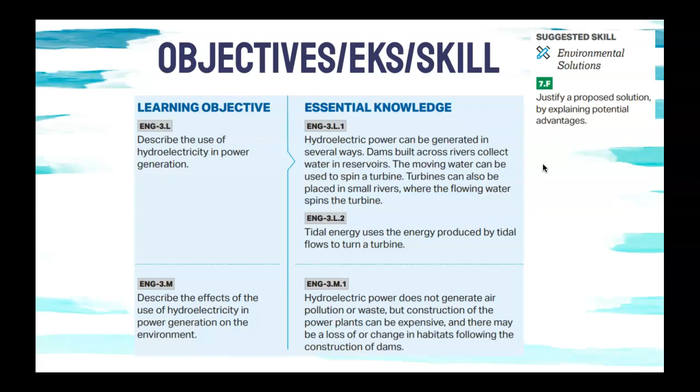So you need to be able to not only describe the use of hydroelectricity with respect to power generation, but you also need to be able to look at the impacts of hydroelectricity on the environment. And so, as a part of hydroelectricity, you'll also need to not only look at traditional damming of rivers and generating electricity that way, but also looking at tidal power as well.

So, some basics about hydroelectricity. So we're taking the kinetic energy of the moving water, so water that is flowing typically through a stream, and we're going to use that to spin a turbine, which is generating mechanical energy, which is then going to power a generator, which is going to create that electrical energy.

So much of the same process that we've been talking about with fossil fuels or with nuclear energy, except that we're not heating the water. We're simply using the kinetic energy of the water to spin the turbine. So we can look at it with the natural current of the river, or we can do it with tides, or we can dam a river and then kind of have the water drop and use that kinetic energy of the falling water.

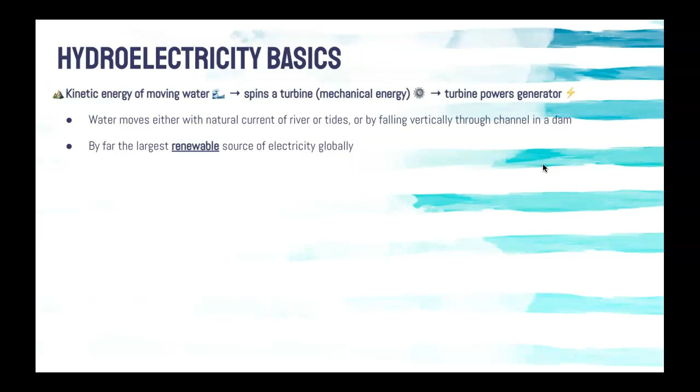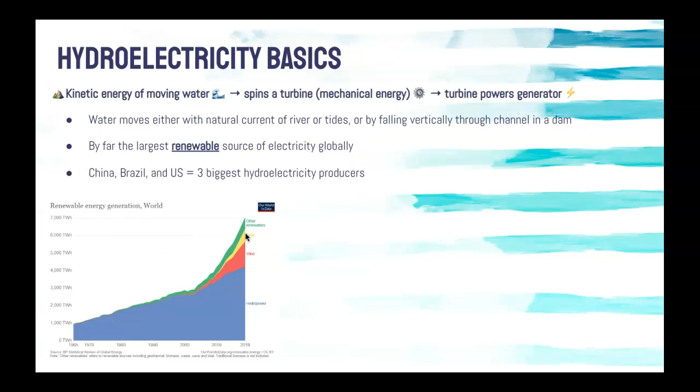So I really need you to understand this process in terms of how does it work? How are we getting energy from water? And so typically we are going to dam a river. So we're going to build a dam in a river. We're going to create an artificial lake behind that dam. So we're going to dam the river and then create this reservoir or this big, basically storage tank of water behind the dam.

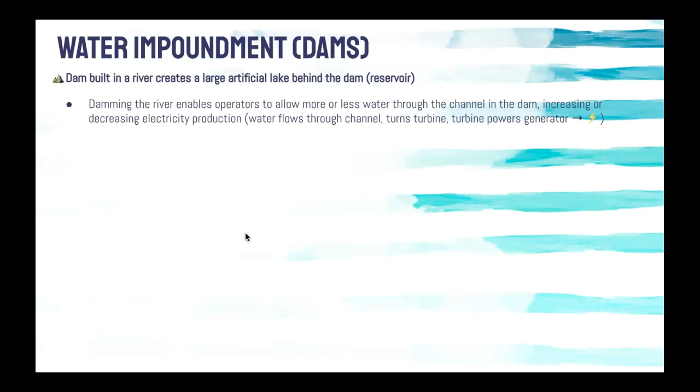So a dam allows us to control the amount of electricity that we're producing, but it also helps in terms of prevention of seasonal flooding. So a lot of times a dam is a welcome thing because it's going to prevent the flooding downstream that may be experienced in the spring or during large rainfall events.

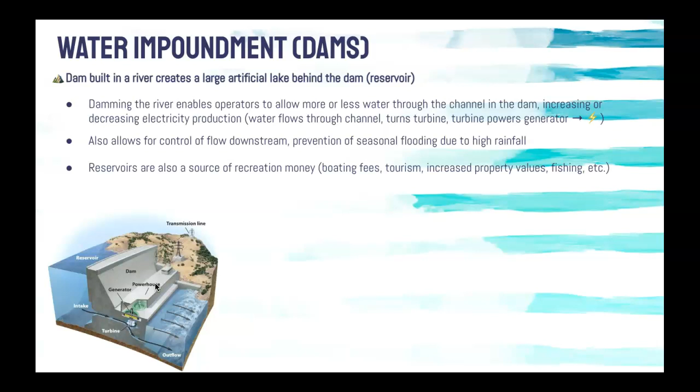Another positive about the damming of rivers is it creates this large reservoir behind the dam. And so that can be a source of revenue because now we have a place to boat and to fish, and you can build homes along the edge of the reservoir. And so it increases property values, which in turn increases your tax revenue and things of that nature.

The two big environmental impacts that you would look at in a negative light are, one, when you build the dam, you're going to flood the land behind the dam. And so you are going to ruin or flood ecosystems that were previously intact behind there.

And then the other thing that happens is that the flow of the river brings with it sediments, and those sediments are often rich in nutrients, and because we're damming the river, those nutrients don't continue downstream, and those sediments can build up behind the dam, and we call that sedimentation. So that may need to be dredged periodically to remove the sediments that are building up behind the dam.

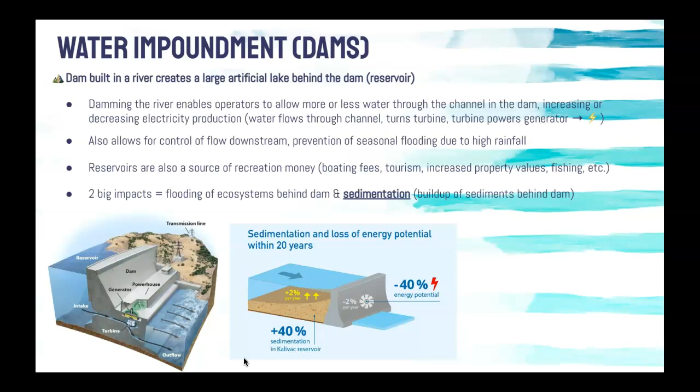So what happens is, if sedimentation is happening, it can decrease the energy output of the dam, which is why sometimes that needs to be dredged and removed.

So another system of generating hydropower is called a run-of-river system. And then we also have tidal power. So now these are different than our traditional hydroelectric power plants where we're damming a river. A run-of-river system, you're still going to dam the river, but you're going to divert the natural current, and you're going to kind of send it through a channel, and then that's where that turbine is going to spin and then generate electricity.

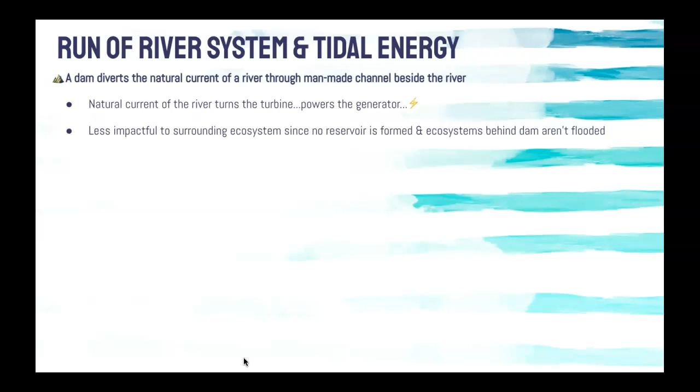So this run-of-river system is more environmentally friendly in that it's not creating a reservoir behind a dam. So we're not losing those ecosystems behind a dam. It is still damming the river, so if the river is dammed, then navigation can be an issue and that kind of stuff. But we're not creating that reservoir.

So we're just creating this channel here where you're going to run the water through this channel and then into an area where we're going to spin turbines and generators, and then we're going to put the water right back into the river where it was. So because we are not creating this massive dam with a massive reservoir behind it, there is still natural flow of sediments through that dam. And so we have less sedimentation as a result.

The issue with this kind of system is that it doesn't generate nearly the amount of power that a traditional hydroelectric dam might create. And if water levels get too low in the summer, it may mean that at some point you can't even divert the water through this system because the water levels are too low.

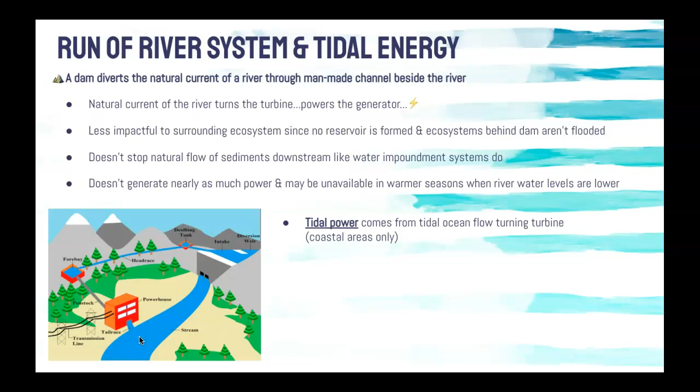Another type of hydropower is tidal power. So this comes from coastal areas where the tides go in and out. We're getting those tides to flow through a system of turbines on their way in and then again on their way out. So as the tide changes, we have movement in, spin those turbines, or movement out, spin the turbines again.

One of the things about tidal power is that you really have to have a very large differential in your tides. So the area, Delaware, we don't have a large enough difference between high and low tide to really make this type of power worthwhile. It's very, very expensive. And the other thing is it needs to be done in an area where it's going into a narrow bay and then coming back out of this narrow bay so that you can get the largest amount of power possible. There are not a lot of these tidal generating stations worldwide. There's one in France and a couple others in Europe, but not many.

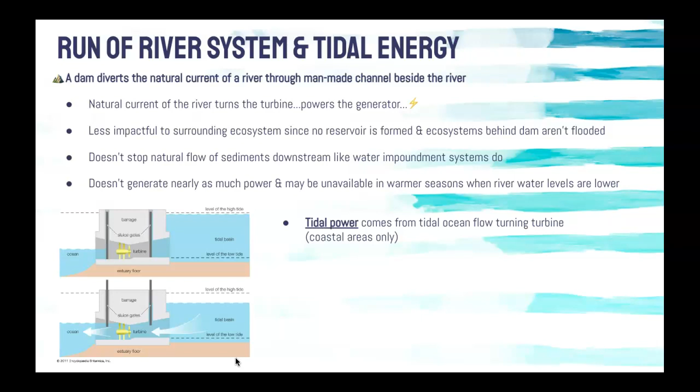So, drawbacks of hydroelectric dams. So, in green are the ecological issues. So, the reservoir is going to flood habitat behind the dam. So, we could lose forest habitat, we could lose wetland habitat. And we know that wetlands are super important in terms of water filtration and breeding grounds and things like that.

It also prevents upstream migration of fish. So salmon, particularly, are born in freshwater rivers and streams, and then they swim out into larger bodies of water, big lakes and oceans, and then they return to spawn or to mate and to lay their eggs back in the original place that they were born. If a dam is there, it creates a problem for those salmon not being able to return to their original spawning grounds.

Sedimentation is another ecological problem that we talked about. So sediment builds up behind the dam. This often makes it so that the upstream habitat becomes warmer. There's less oxygen in those upstream habitats, and then the rocky stream bed that a lot of organisms need to lay their eggs becomes covered in sediment. So it's no longer ideal for laying eggs.

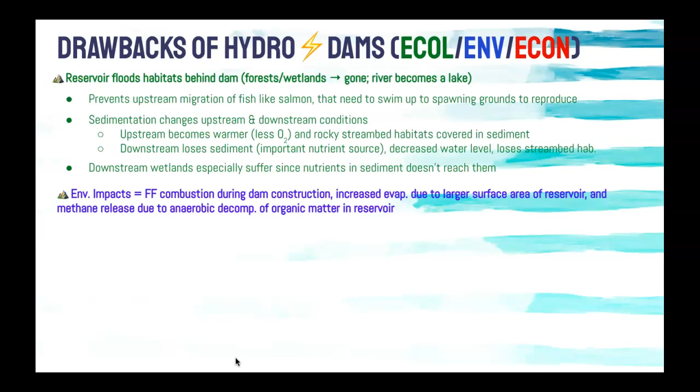Some economic impacts of these dams. Obviously, if there were previously existing homes, businesses, towns, things like this behind the dam, those get flooded and they would need to be relocated. Initially, the cost of building dams is very, very high. The cost to run them is low, but the initial construction of the dam is high. And so there's jobs initially, and there are long-term jobs. And then we have to dredge for the sediments, which comes at a cost.

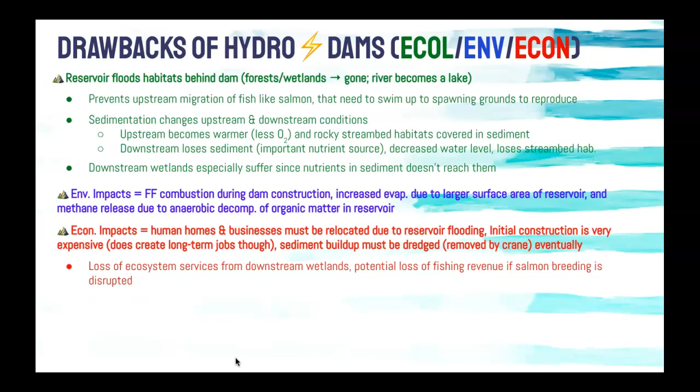Also downstream, because of the lack of nutrients and reduced water levels downstream, we may see the dry up of wetlands downstream, which can be problematic. Now, the last thing in there was also potential loss of fishing revenue if salmon breeding is disrupted. So this is an issue. Salmon are a big business, multi-million dollar business. And so what has happened in a lot of these cases is that we've built fish ladders to deal with this issue of the salmon not being able to get beyond the dam.

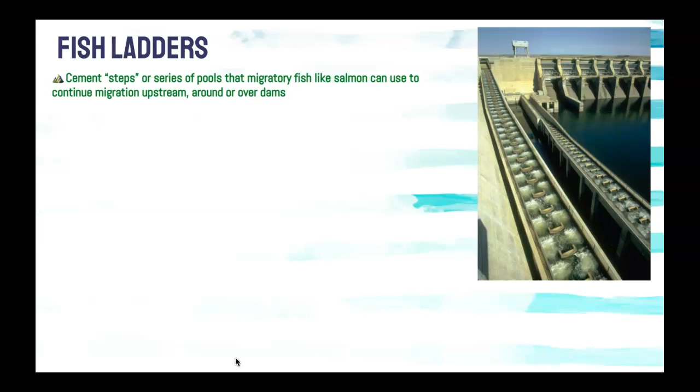So a fish ladder is literally like a series of steps or concrete little platforms that the fish can jump their way up the dam. So here's another example. So they can get into here, jump up, jump up, jump up, and then they can get to where they're trying to go. So this allows for the salmon to still breed. The salmon are not only an important revenue, but they're also an important food source for eagles, osprey, bears, things like that.

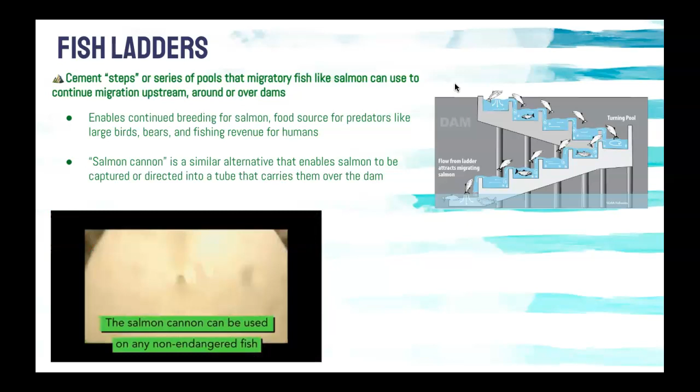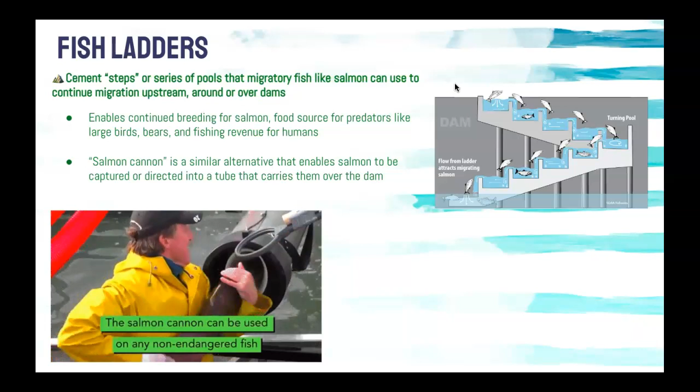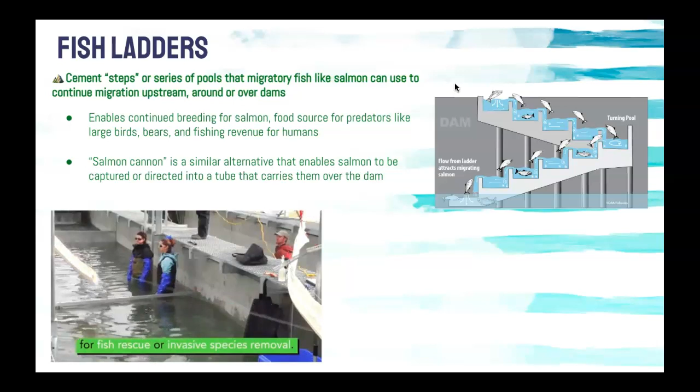The other thing that sometimes happens is during this breeding season, we can have a salmon cannon, which is literally like it sounds. You can see it in the picture there where they are putting the salmon into this chute and basically shooting them up and over the dam. The salmon go up to spawn to lay their eggs and then they die. So this is not harming the salmon, but it is getting them to where they're trying to go.

The benefits, on the other hand, of hydropower: there's no greenhouse gases when we're producing the electricity. So running of a hydroelectric power plant does not create any greenhouse gases. We talked about that the reservoir behind the dam can be an attraction and tourist revenue. There are jobs created to maintain the dam. It is a reliable source of energy. So we're not really weather dependent.

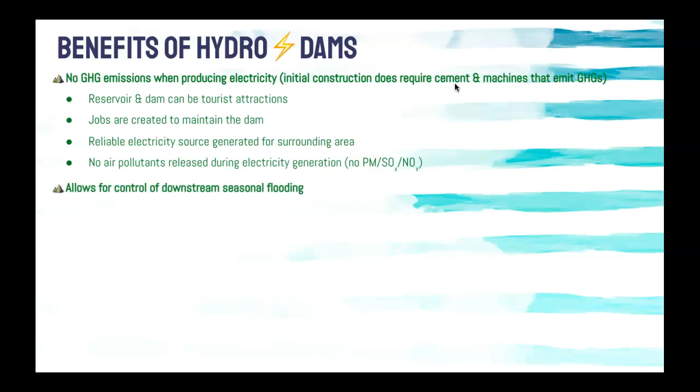We're somewhat weather dependent and snowmelt dependent, but traditionally it's very reliable as compared to some of the other renewable energy sources. There's no air pollutants, so no particulate matter, no sulfur dioxide, no nitrogen oxides. And then it allows for the control of that flooding downstream, so it can be helpful to downstream communities. So in the US, we have lots of dams on many of our rivers, but only 3% of dams are for hydroelectricity. The majority of our dams are for recreation or scenic purposes or for flood control. So these hydroelectric dams can provide both of those things while still providing power.

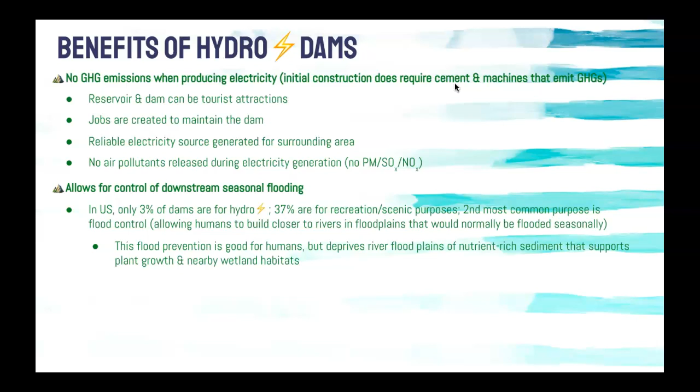We talked about that the flood prevention is really good for people, but that it means that the nutrients are stuck upstream, and then that can be problematic for the wetlands and things downstream. And so what I'd like you to do is explain two benefits other than agriculture and recreation that people could gain from constructing dams on rivers.